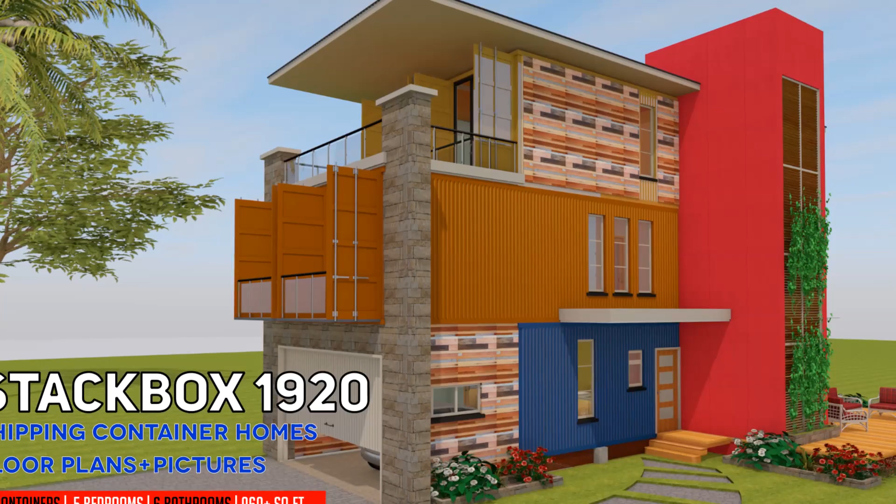And welcome to this week's video where we bring you Stackbox 1920. This is a shipping container house made from 6 40-foot shipping containers. Stay tuned to find out more.

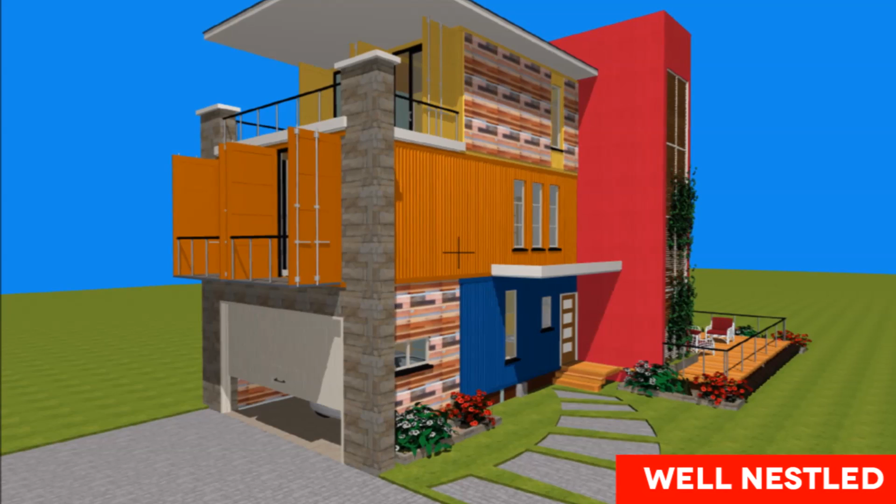Welcome back. As I indicated earlier, we have designed this house using 6 40-foot shipping containers, and we've managed to create living areas on the ground floor. We have managed to create a nice looking form where we have cantilevers and outdoor sitting spaces created based on how we manipulated the forms.

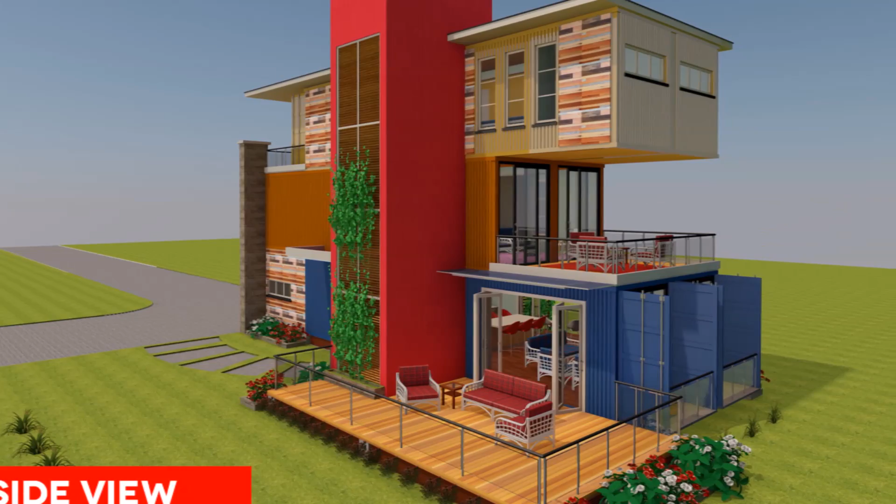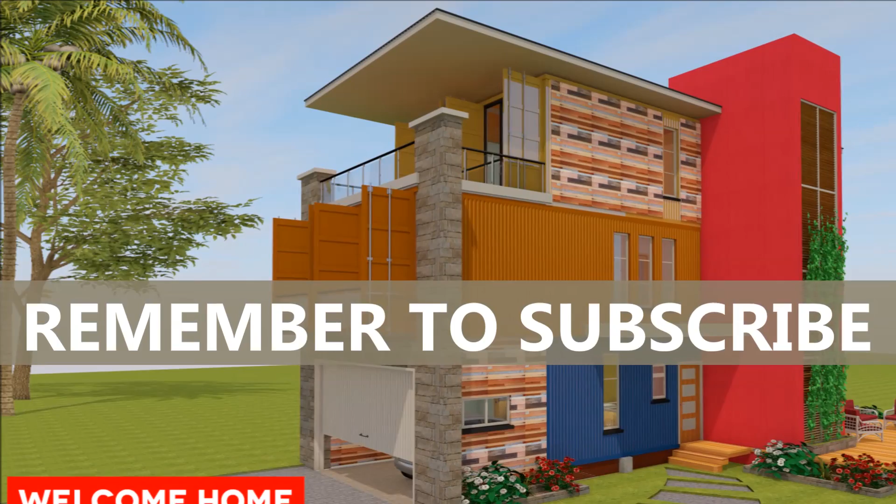We have bedroom spaces on the first floor. We have 3 bedrooms, and we also have a family room on the first floor. We have managed to introduce a nice, interesting feature wall on the front facade and a very well done stairwell in red color, as you can see.

We have bedrooms also on the last floor, which is the second floor. We have the master bedroom there and another bedroom on that particular floor.

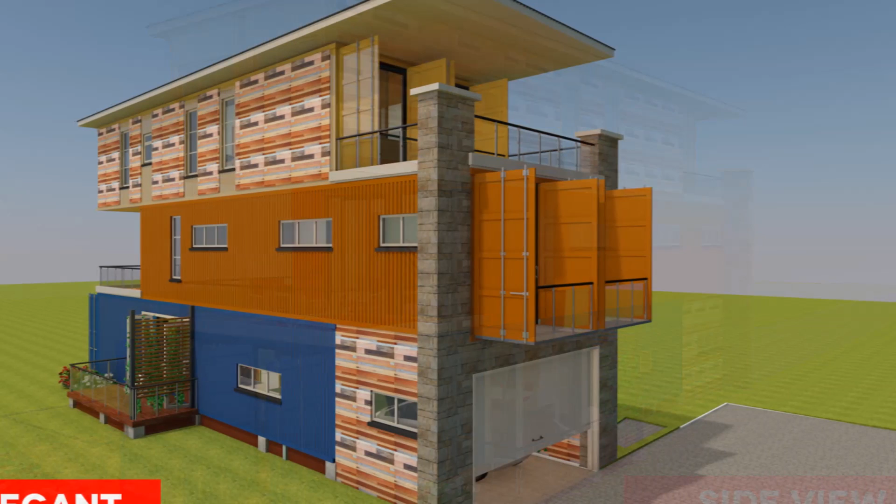So we have managed to leave the exterior walls as they are, so that at least you can keep the history of the containers as they came from the high seas. You can try out a bit of cladding as shown on the second level, and also a bit of color as shown on the staircase shaft.

Looking at the foundation and also the design brief and concept, we have used these 6 shipping containers and we've stacked them on top of each other. We've done a bit of shearing horizontally to create some interesting balconies and terrace spaces on both the first level and the second level.

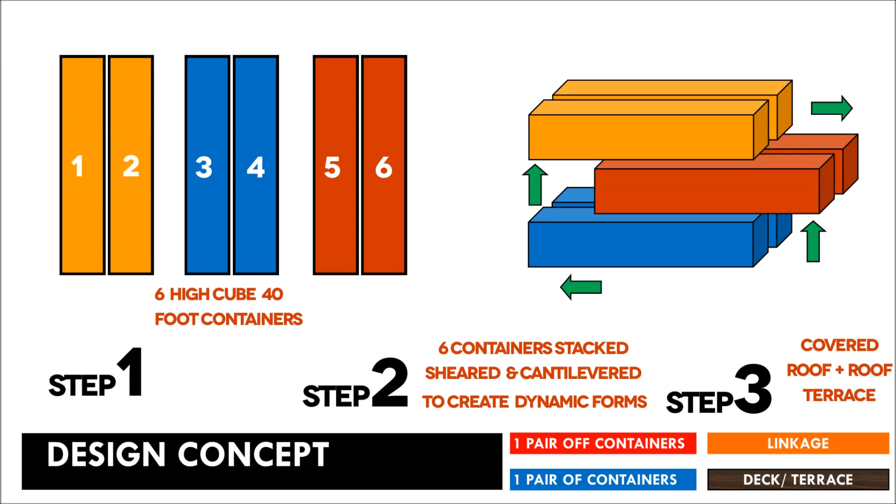This gives us an opportunity to manipulate the form and create an interesting appeal in terms of design, because if you just use blocks stacked on top of each other, they'll give you quite a boring design. So this is a bit of design input from our end to give it some character and flair.

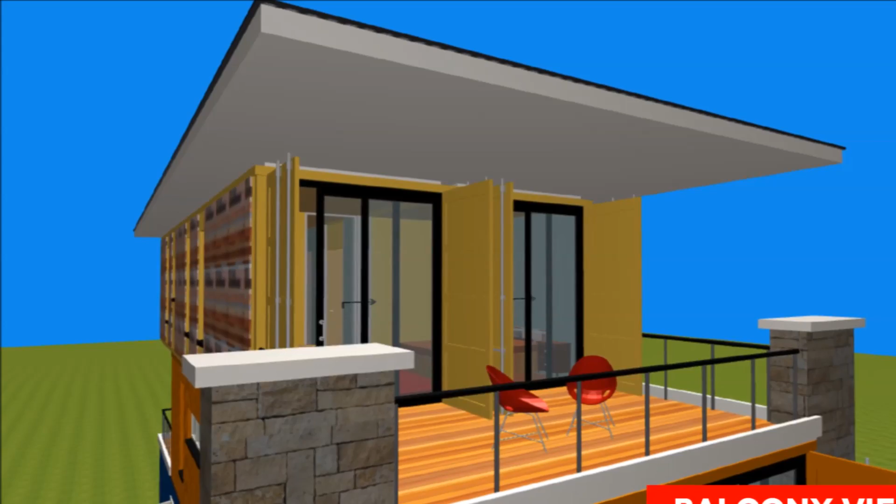From there, the uppermost floor is given corrugated sheet roofing, protected from weather elements. The generous overhangs, as you can see from that view, protect the entrance to the balcony space, so that it is shielded from rain and other weather elements.

The front wall feature, as I indicated earlier, gives us an opportunity to create an entrance to the garage. Many people have been asking for a design with a garage, so there you have it. You can have a look at it and explore other opportunities in what you can do with it.

That's another view of the master bedroom balcony on the uppermost floor, and it gives you an interesting view of the entire project from that elevated position.

That is a family balcony on the first floor level, and it is protected from weather elements with a nice overhang on top, as we have indicated there.

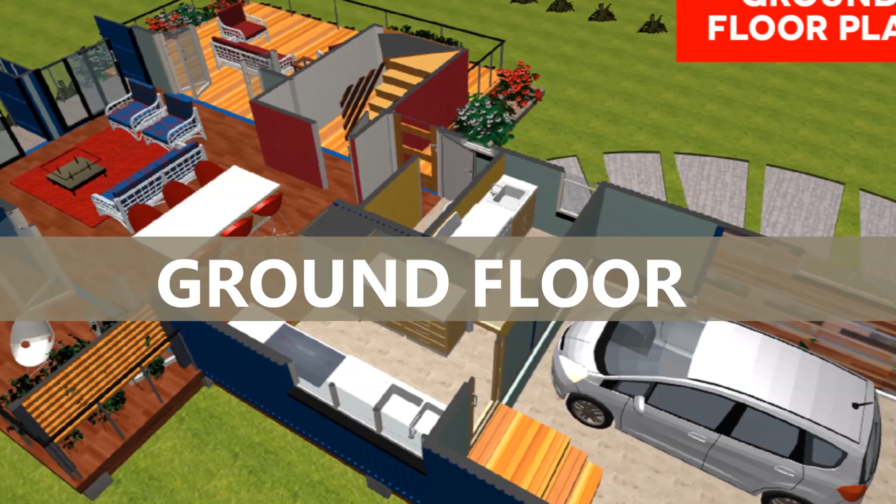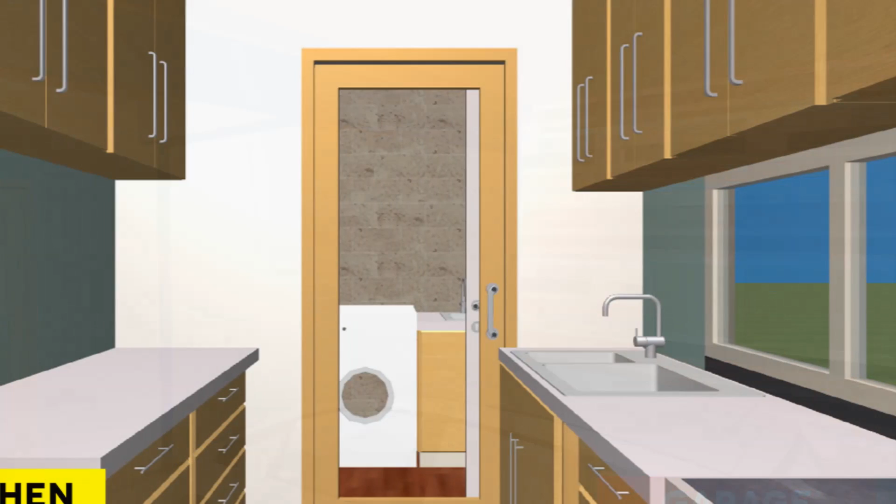Looking at the interior design and furniture as we have used in the design, we have always indicated that you need to try out transforming and space-saving furniture ideas, folding chairs, stackable chairs, flat pack cabinets for your kitchen and wardrobes, so that you can save on space and also save on time and even save on money, because flat packs can be bought from a hardware store and they're easy to install, since they come with an installation manual, which makes it easier for you, especially if you are doing a DIY project.

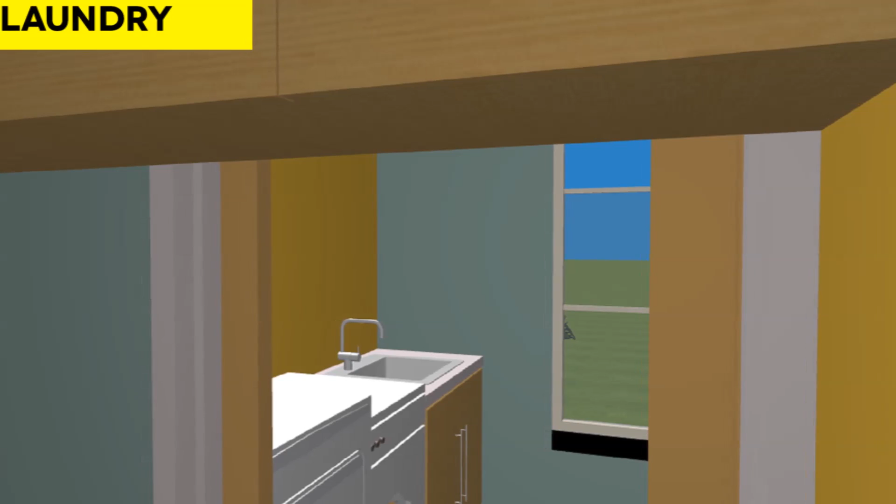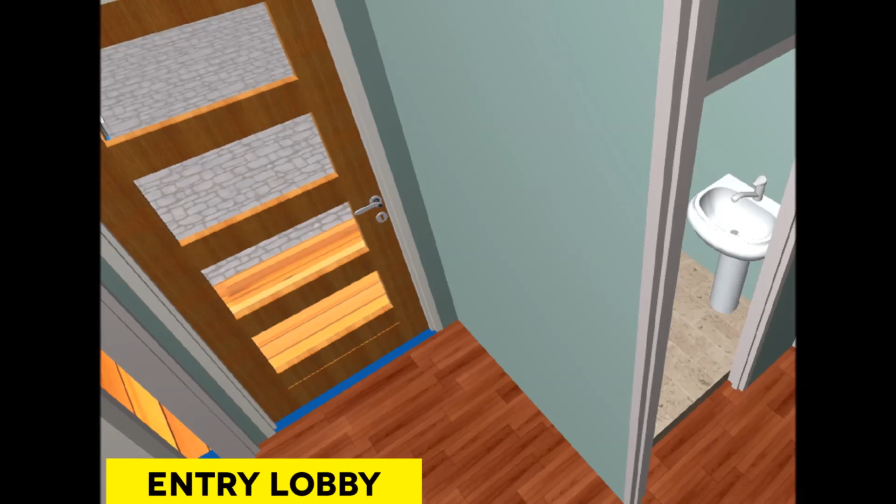That is the laundry space for our house, and at least we managed to accommodate everything you would need for a comfort stay. From the entrance lobby, you also have access to the cloakroom, so if you have visitors, you don't want to interfere with the privacy gradient of your house, this gives you an opportunity to do that.

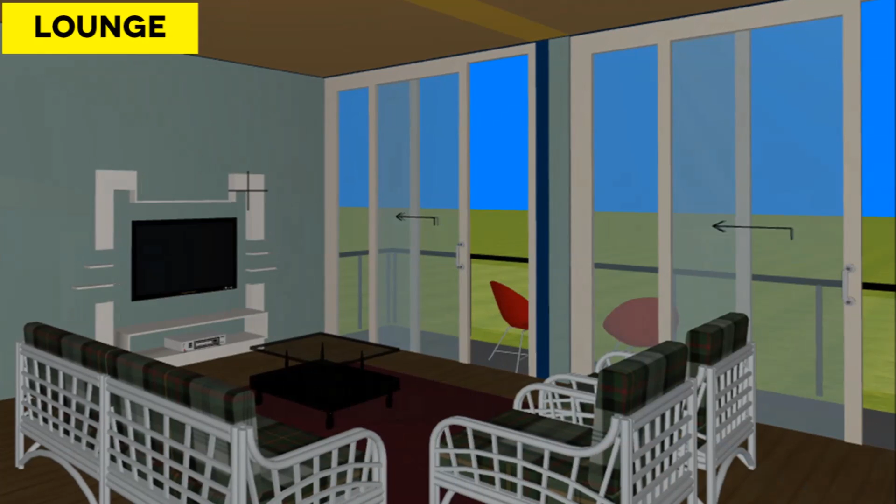We have stackable chairs used in the dining space so they can be stacked and stored away, creating space for something else if needed. In the lounge area, we have easy seats that occupy very little space, so the general view of the living room is sparsely furnished, so you don't feel cluttered.

Going upstairs, the staircase gives you an opportunity to land on the first floor level where we have 3 bedrooms. Bedroom 1, bedroom 2, and bedroom 3 all have their own bathrooms, so there's no sharing of bathroom in this instance—they're all self-contained, giving you an opportunity to create a bit of privacy. With a house of this size, you'd definitely want that kind of luxury, if you want to use that word. So all those bedrooms have their own bathrooms.

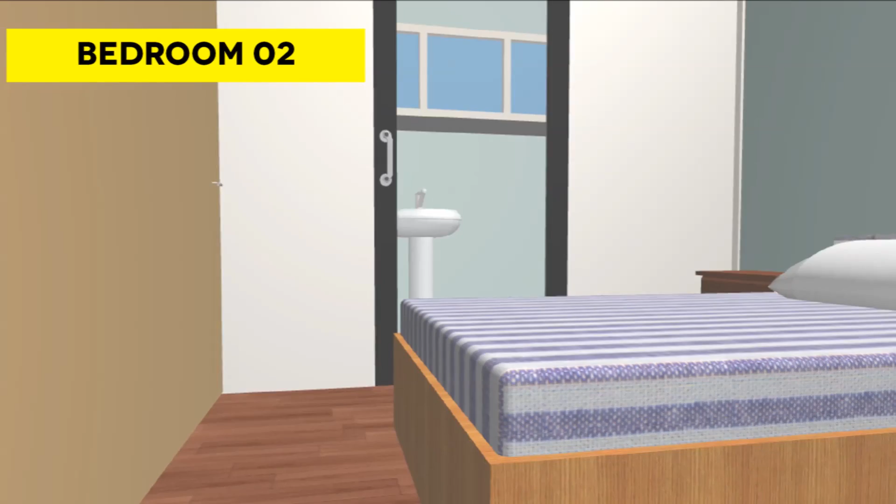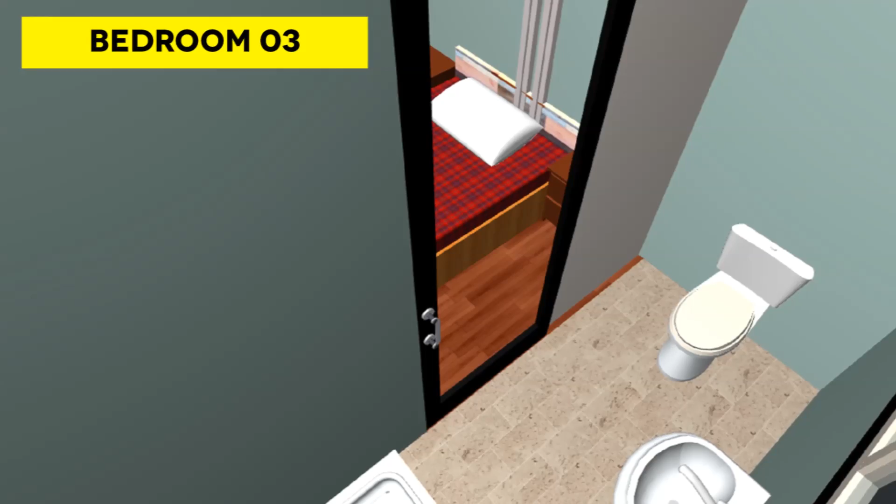In terms of colors, we've always said use monochrome colors and light colors, so that at least they don't make the space look so cluttered. They make it look a bit spacious, so that you can get rid of the claustrophobic feel of shipping container homes.

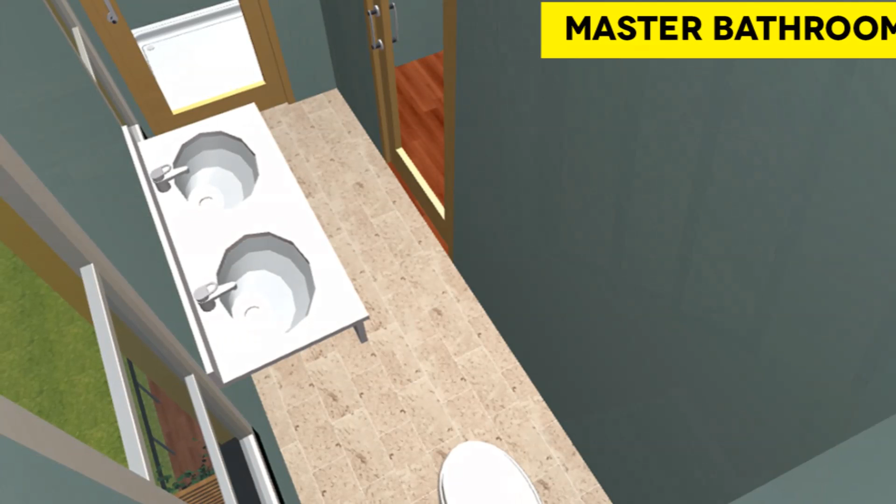On the second floor, we have an exclusive master bedroom and one more bedroom, call it bedroom 4. The master bedroom comes with an opportunity to put a queen size or king size bed, depending on preference. We have a lounge sitting area, a master bathroom with a separate bathroom and toilet space, and a walk-in closet so you have enough space to store your stuff. For this size of house, we believe this particular master bedroom size just fits the bill.

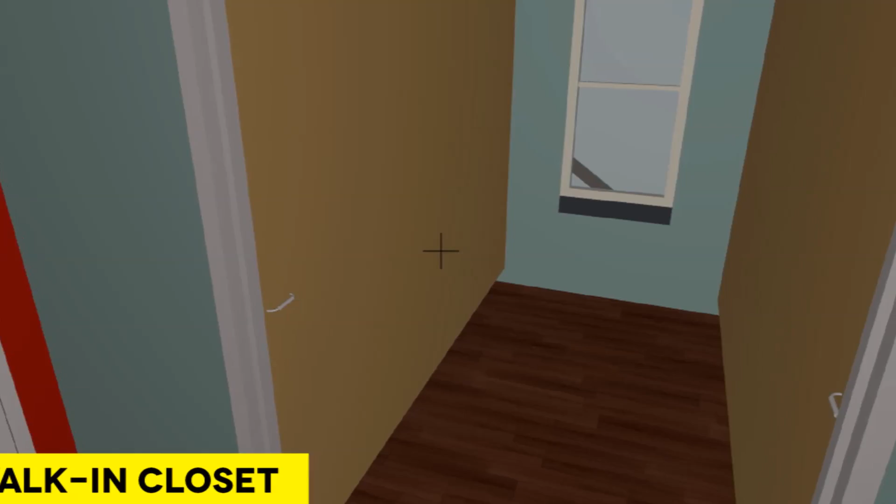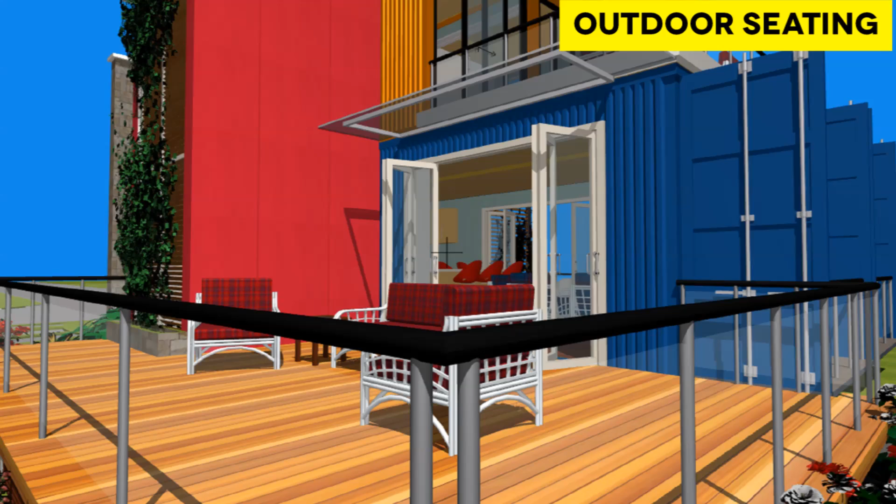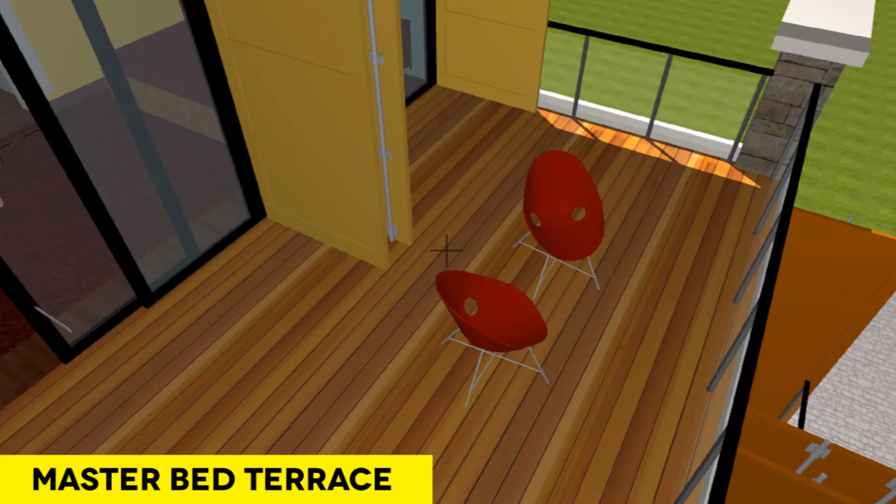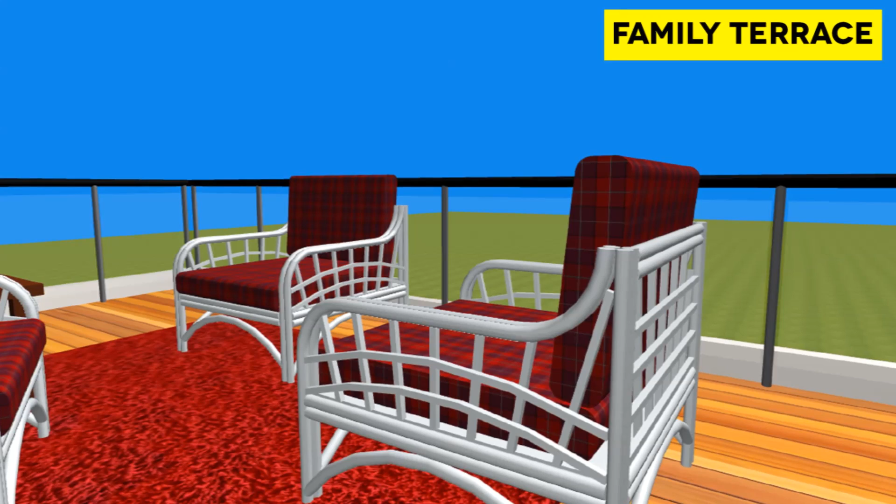So outdoor living spaces in this design—we have two on the ground floor level, one for the dining space and one for the living or sitting area, to create a bit of relief from the tiny spaces inside the container house. On the master bedroom level, we have a balcony space, and also a nice outdoor sitting terrace for the family on the first floor level. This is important to create relief spaces on the outside from the tiny container spaces that come with the modular sizes of shipping containers.

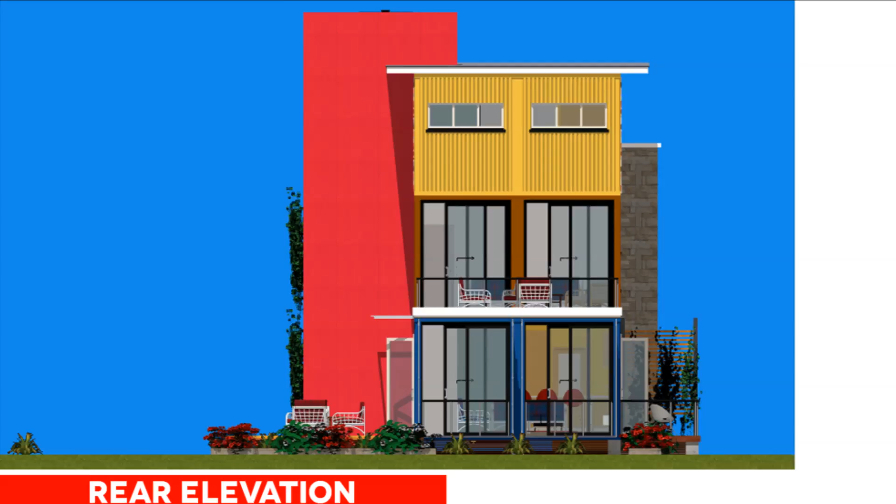We have elevations, you can have a look at them as indicated. When it comes to insulation, it depends on the climate. If you're coming from a tropical climate, the only thing you need to worry about is the heat—how to keep heat away from your shipping containers. You can use design principles of cross ventilation, using fenestration on both sides of the house, allowing free flowing cool breezes found in the tropics.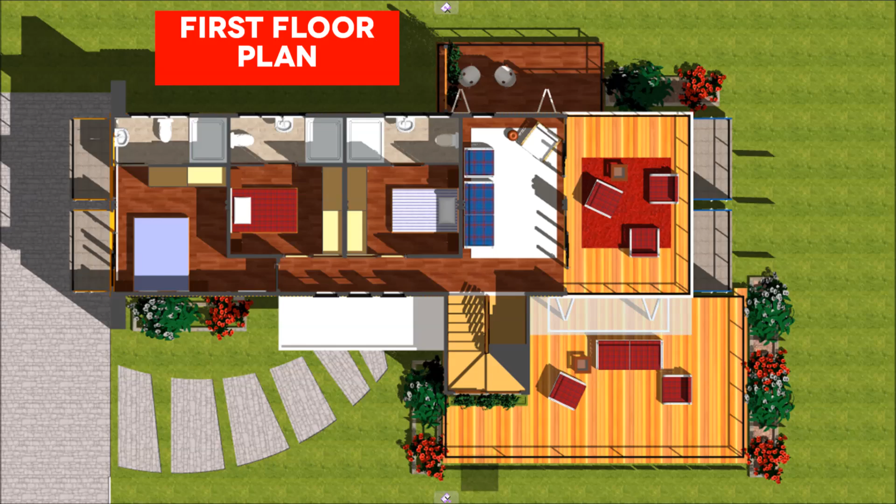If you're living in cold environments, it's very tricky. You need proper insulation to avoid condensation, so we'd suggest you use spray foam insulation. It's a bit costly compared to others, but it gives good results and keeps your interior spaces away from mold and dampness.

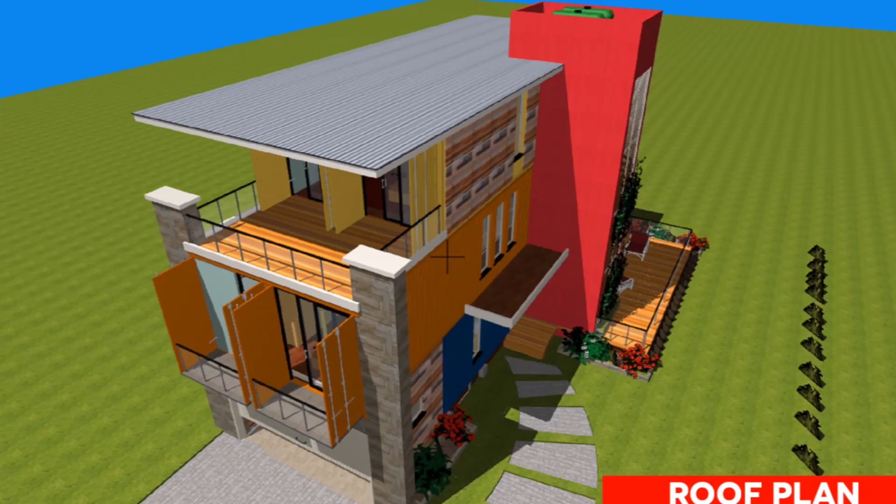The house is covered using corrugated steel to also keep the upper level cool and protect it from excess heat.

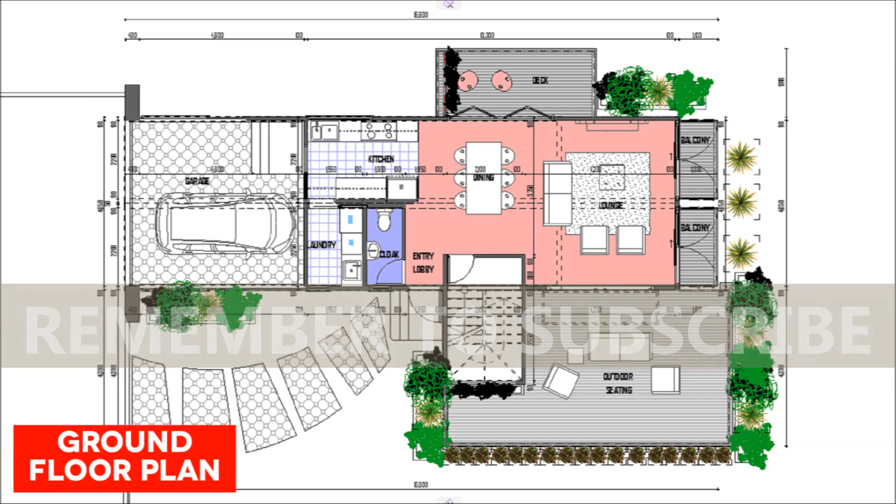We have given you drawings for this project, and they come in full color and also grayscale. So you have the floor plans, the ground floor plan in full color, and the elevations in grayscale and full color. It's up to you to decide what you need and what you want to use them for. You can have a look at them and seek inspiration, or use them if you want to modify your project. This gives you an opportunity to do exactly that.

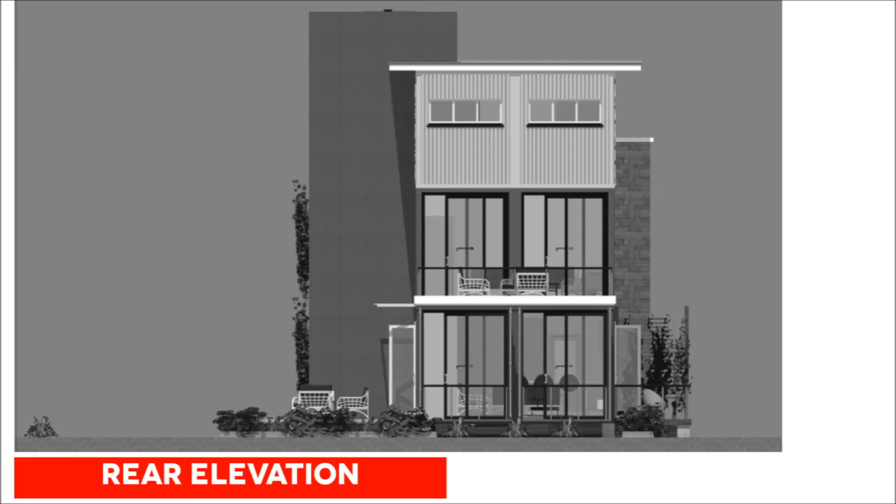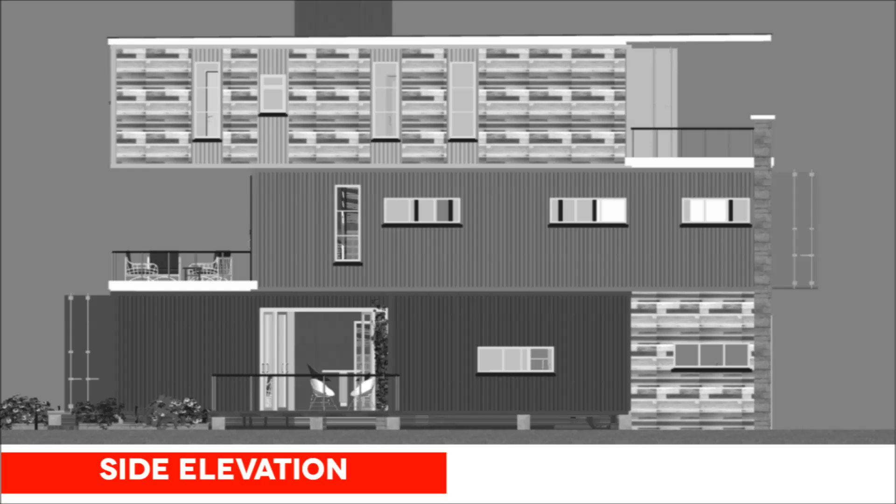As we always say, we don't cut the roof, and we also don't cut the floor of our shipping containers. We only interfere with the walls, because it's very expensive to restore the roof and floor of shipping containers, so we don't tamper with them at all. We just modify the walls, and that's why you look at our staircases the way we design them - not inside the house, so you don't mess up the roof and the floor of the shipping container house. Otherwise, if cost is not an issue, feel free - you can explore all manner of cuttings, and the floor and roof are also an option for you. But in our designs, as a rule of thumb, we don't interfere with the roof and floor of shipping containers.

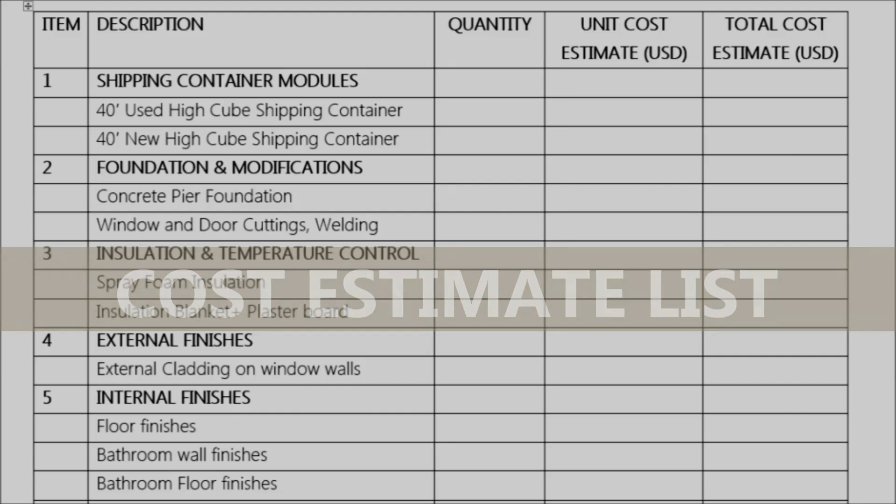So we have a cost estimate checklist you can also use for your project. What we normally do is give you an opportunity to use this to do a breakdown of what you would require when doing your small or big container house build. You fill in what you need, discard what you don't need, so it helps you plan for your project, know what you need to do, and how much money it will cost.

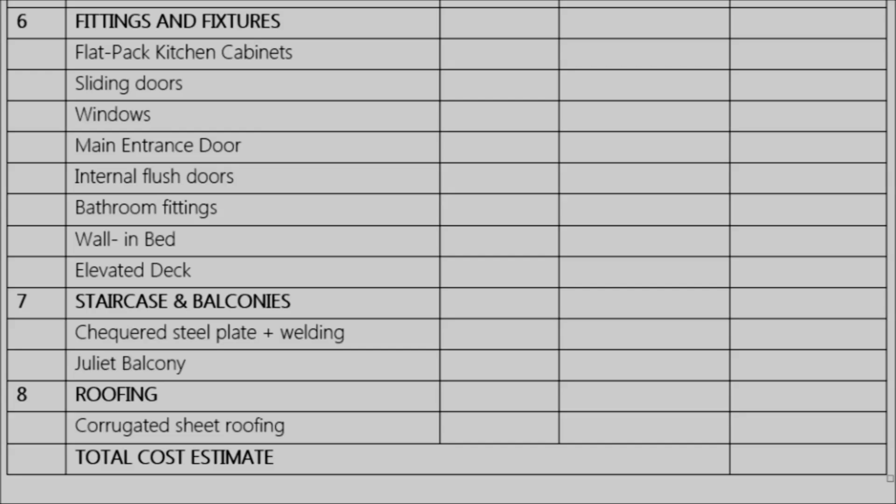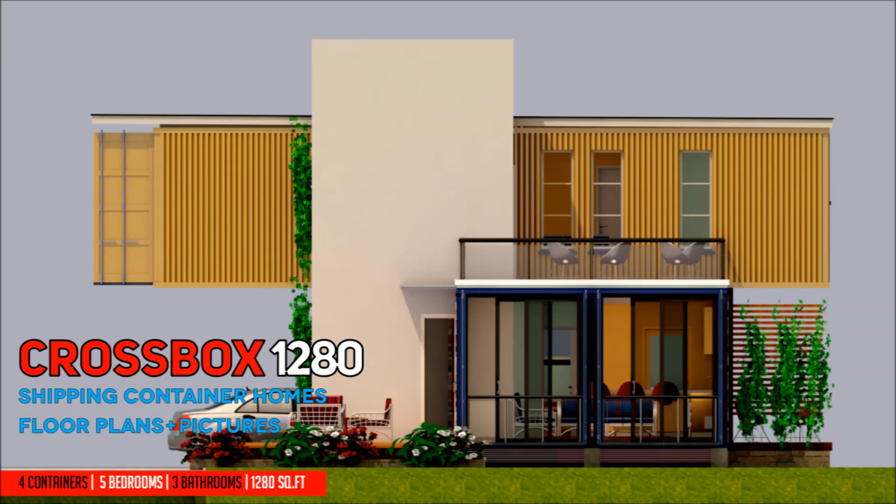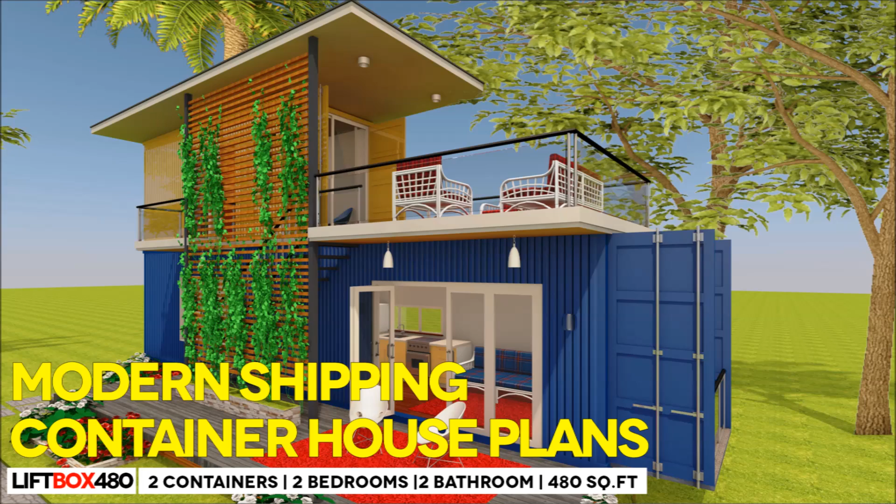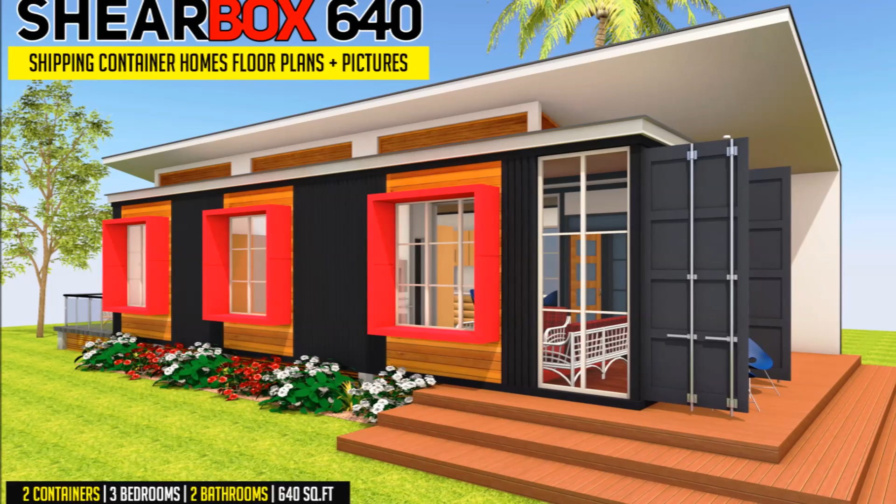We've done other projects in terms of design - have a look at them. We have ECOBOX 320, CROSSBOX 1280, CLIFFBOX 640, a bachelor pad we call a container cabin, LIFTBOX 480, and a couple of others. In fact, I would wish to talk more about this project - the SHEARBOX 640. SHEARBOX 640 is quite an interesting design in our design series.

What we've done is use only two 40-foot shipping containers and managed to create an interesting design whereby you can even have 4 bedrooms fit into those two modules. We also have a 3-bedroom option. Have a look at our video on SHEARBOX 640 so you can see it and give us your comments on what you feel we should have done or shouldn't have done, and maybe moving forward we would improve on that and include it in our coming designs for shipping container homes.

You can also have a look at SPLAYBOX 1280, so that one is just on the ground.